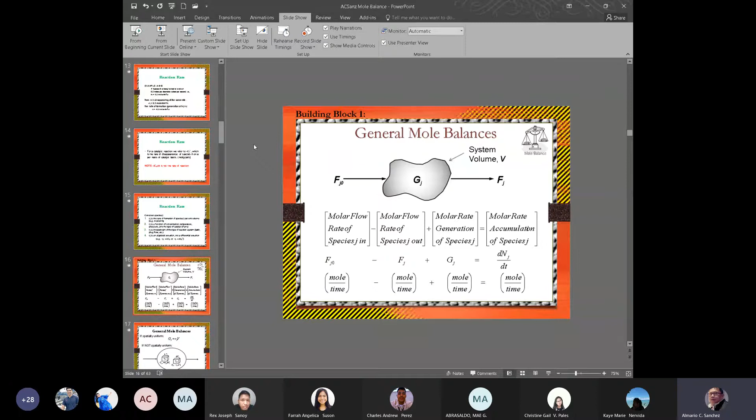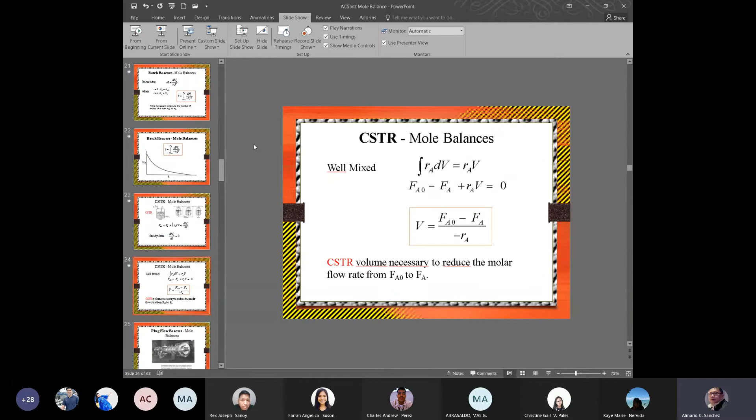But then I realized that if we are going to do these things directly, like chemical engineering balancing and reaction rate, we might struggle, especially with this general mole balance. I believe before we proceed, maybe tomorrow or Monday or Tuesday, this is the heart of it, the essence of our topic. And this is a very long topic, everything needs your prior knowledge.

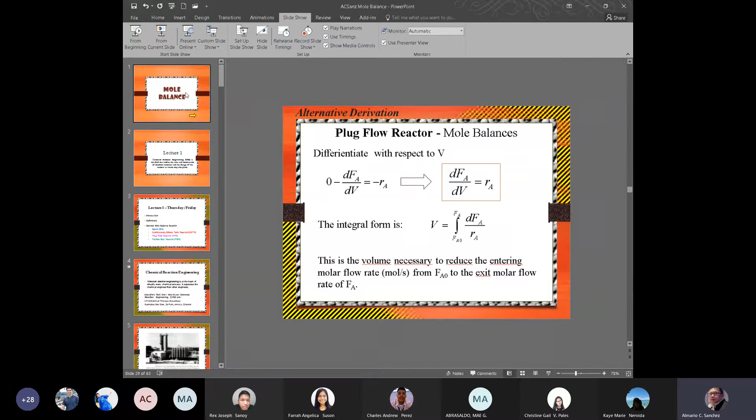All your knowledge needs to be applied here regarding chemical engineering. So what I'm going to do is give you the theory, so we can recall our theories about mole balance in relation to this subject, chemical reaction engineering and kinetics. Let's just recall it. So we'll go directly to a video.

Wait. Not this one. Okay.

What's up guys, it's me, chemical engineering guy, and we're going to continue with the topic. This is a video taken from the mass balance YouTube course by the chemical engineering guy, introduction. You can also find MB number one on YouTube. We've seen MB number 0, which is essentially just the overview of the course.

Sorry about it. Let's continue with the next chapter, which is essentially only two sections. The content here is section 1, which is the theory, which I like to call the basics of process or chemical engineering. The least stuff you need to know as a chemical engineer is here.

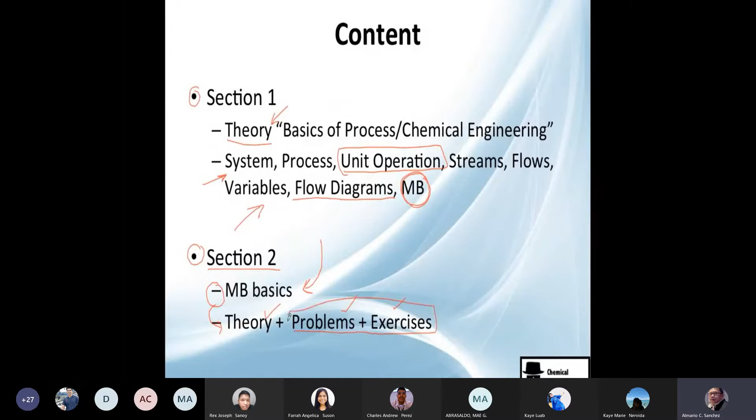Now, once we understand the basics of mass balance theory, we're going to see some problems and exercises. These are the ones that are going to help you to understand. Now, let's continue with section 1.

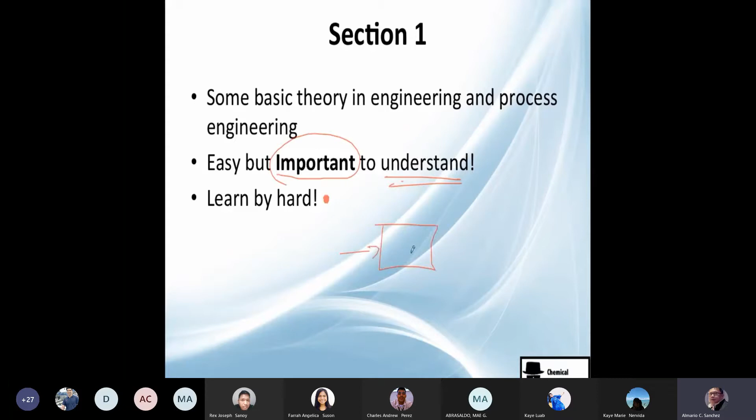It's some basic theory in engineering and process engineering. As I told you before, it's very easy because it's just to learn, but it's very important to understand it. Don't just learn it by heart, but at least learn it very hard if you cannot remember, but understand. You need to understand what is a system, what is within, what is without, etc.

Now, let's continue with the theory. The basic definitions that we're going to see are these ones here.

Chemical processes are in general processes that involve some stuff of chemical, like production, reactions, products, reactants, etc. We're going to see what is a unit operation, how to distinguish it from other, non-unit operation things.

Then streams, flows, is essentially all the arrows you see in a process. It's matter being held here. Then process variables, which is like pressure in the tank, temperature of the current or flow, composition of A in the flow, velocity, height of the tank, etc.

Now we're going to see what is a flow diagram. This is very important because we are going to base our problems in this one. And actually we have three, which we're going to see further. Then, well, this one should be inside of this flow diagram, block diagram, etc.

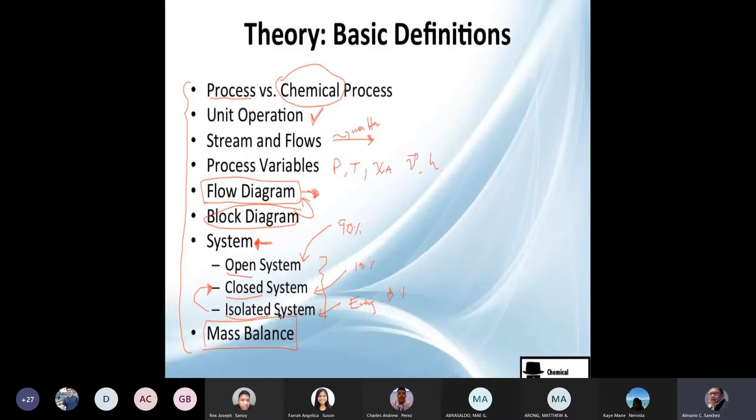Now let's continue. I told you we're going to see process. Let's give a formal definition of process. Process is simply a series of actions or steps taken in order, it's important, in order to achieve a particular end or product. You start here, you go here, then you go here, you finish here, etc. I'd like to present you a diagram of a crushing plant.

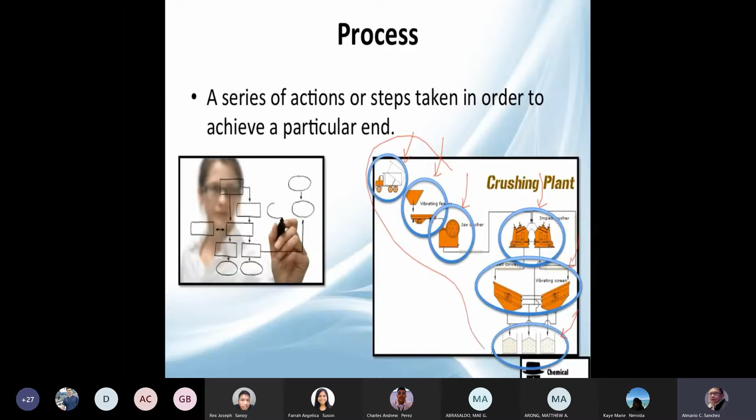Crushing plant is nothing but this process here. And one thing that I want to show you is that actually processes are made many times out of many processes. All these circles are processes, and the total of these processes makes another process.

Let's see. Number one, you need to bring the stones from the mine. Number two, you need to put them or throw them in this feeder to transport it. Number three, you're going to crush them. But it's not like that fine, okay?

We continue, we go to the impact crusher, keeps crushing and crushing. Then we bring them here. It's already crushed. Then we're going to vibrate, and they will go very, very finely crushed. You see, this is small, this is medium, and this is big.

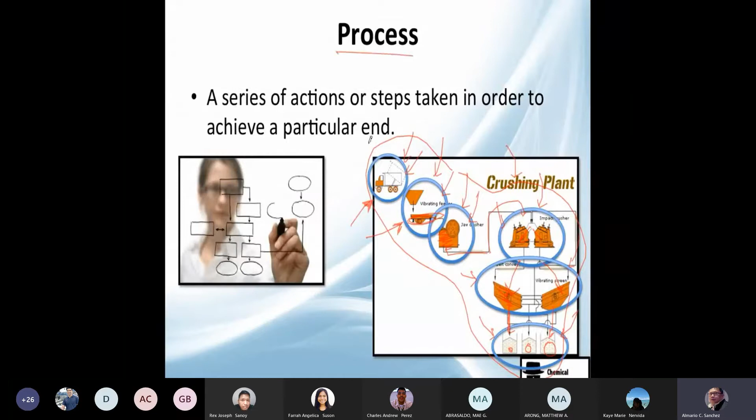Now you see each process: transporting, crushing, separating, and storage. All these processes make a whole process, which is called the crushing plant. So just take importance that you can always make sub-processes inside a process.

Now let's understand the difference between a normal process and a chemical process. A chemical process is essentially, let me show you the meaning from Wikipedia. I like it very much.

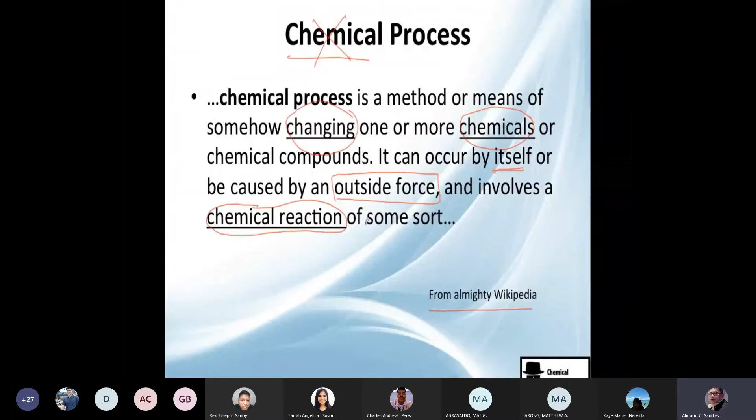A chemical process is a method or a means of somehow changing, you need to have a change. One or more chemicals must be involved, or chemical compounds. It can occur by itself, it's not that normal, or caused by an outside force, which we are going to give. And it always involves a chemical reaction. If there's no chemical reaction, it is not a chemical process. So just learn this: change of chemicals, outside force, and it involves a reaction.

If you understand that, you are going good. Now, this is a chemical process: the production of mighty beer. I love beer, you love this, you've probably seen one before. It consists essentially of milling, mashing, lautering.

This one is very important, boiling. Then comes the whirlpool, then comes the cooling. And the most important part is the fermentation. This circle here has the most important chemical reaction. So this one here makes the whole process a chemical process.

But for example, milling is not that chemical process. Mashing probably not, it's only mixing water. It may have some chemical reactions, but it's not the main chemical reaction.

The main chemical reaction comes here, and also maturing, but not that much. Filtering is only taking stuff out of the liquid, and packaging does not involve generally. Then it goes to distribution. So this whole process is a chemical process just because there's a fermentation here, a chemical process.

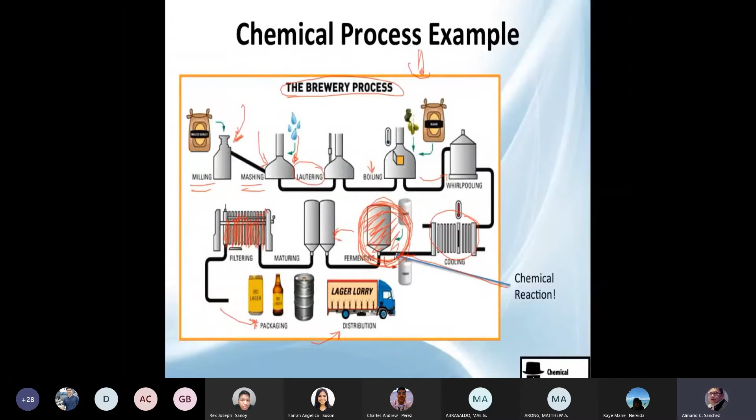Okay, now let's keep going with the type of diagram. The block diagram, maybe you know, is the most simple one. Flow diagram is a little bit more technical. Let's say if it's a tank, you might add something more, like you will say only tank here, tank here also. Maybe you add extra data: temperature, pressure, steel, materials, etc. And this one here is like the most complete one.

It will actually tell you, oh, you have this electronic device here, and this one goes here. This pipe is about 4 inches. I don't know, it will be more complete. I'm going to explain them in the next slides.

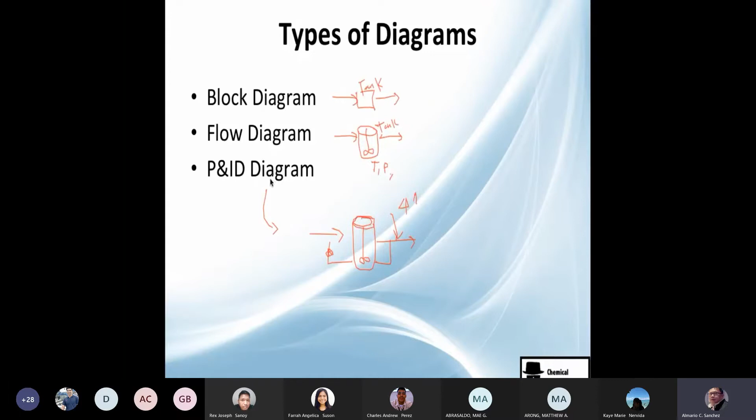Now, block diagram, easy. It's a simple diagram that shows at a glance the process. So no complications. I just want to see here the reactor. There's a gas separator and a distillation. It's the most used for mass balance solving. Why? Because we don't need to know how the reactor is operating. We just need to know the mass balance, what enters and what goes out.

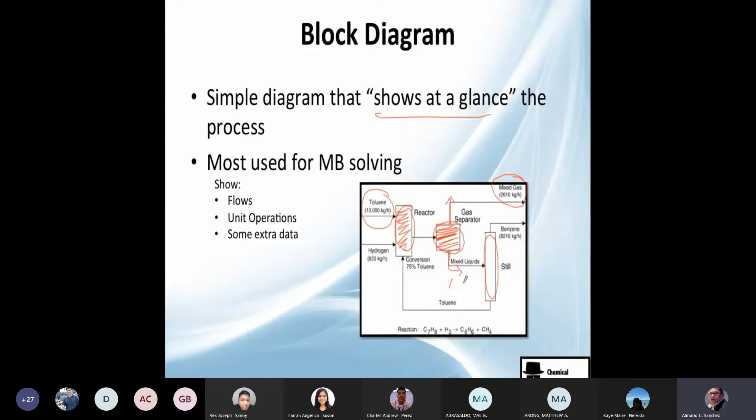Now, gas separator, you don't need to know the mass separation principle that it works. You just need to know how much concentration or flow is going here, the mixed liquids, the concentrations, etc. And the distillation, you don't need to know how it operates. You don't need to know how many plates you need, how much must be the diameter of the tower. No, you just need to know what goes up, what goes down, or the feed.

Okay, so this is the most used because it's fast. Just if you're interested in the mass balance, you just keep doing these ones and ignore all the ones I drew here.

Now, it's very important to include flows. This is the ones you need to include, these are all these arrows. Unit operations, I told you, you don't need to know how they operate, but just show them so you know, like this box makes something magical. I like to call this the black box, because you don't know what happens there, but something is happening.

Put it there, and some extra data, for example, conversion. Actually, you don't know how this works, like how many degrees or how much energy it needs. You don't know the reactions or etc. You just know that there's a 75% conversion. Okay, basic.

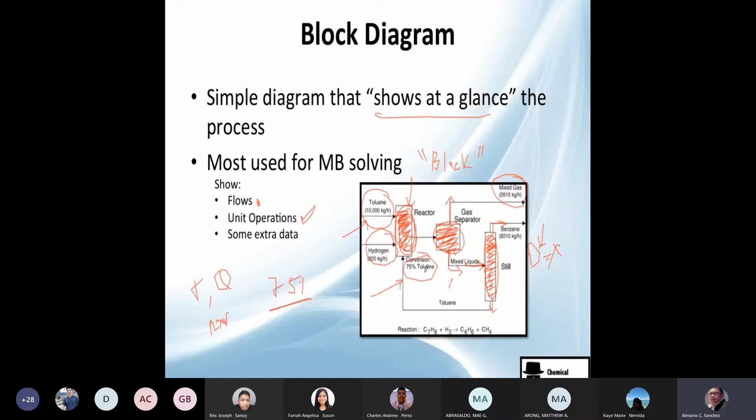Now let's go for the flow diagram, which is essentially the same, just with a little bit more data. For example, you have this here, you divide it top, bottom, you show the heat exchanger, a pump maybe, a storage center here, your main operation unit, you show this valve, etc. This is like the typical process flow.

Not that much information, it's enough. I don't recommend doing this that much in mass balance, because then you will need this current, then it mixes and comes to this valve. Let me do a mass balance in this valve. Doesn't make sense, because it's actually just entering the same and the outlet is also the same.

Also in a condenser, the only thing you change is temperature, maybe a little bit pressure, I don't think so. So just keep with the temperature. So the stuff entering here is the same as the outlet, so ignore that, okay? But it's important, if you're actually doing a mass balance and energy balance, you will have to know where is the condenser, where is the heat exchanger, where is this one here, the boiler, etc.

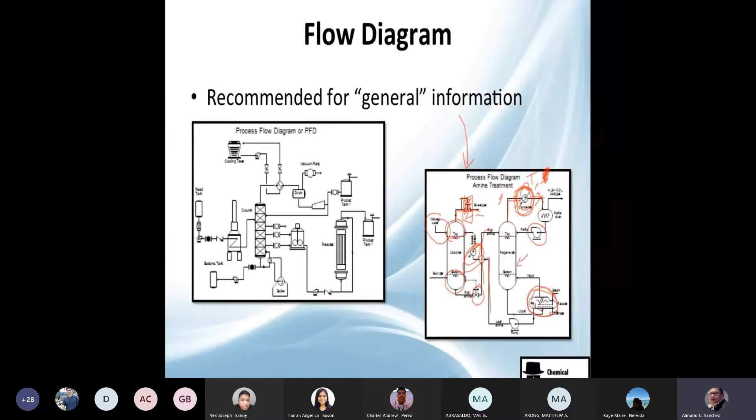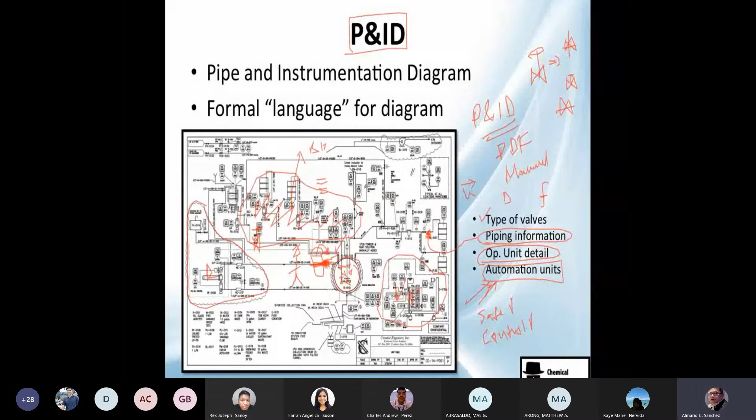Now let's continue. I absolutely do not recommend this level of detail for a mass balance. If you're working with this, you'll probably say, okay, all this part can be called a black box, and you don't need to take care of it. Then you'll see this one is one unit - let's say it's a refrigeration unit. You put all these together and say this is the vapor recuperation unit, etc. You can build systems over systems, so don't worry.

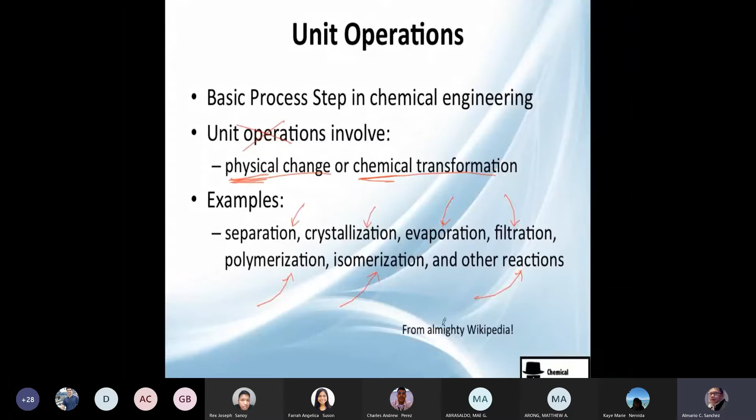Finally, let's talk about unit operations. It's a basic process step in a chemical engineering process. A unit operation almost always involves a physical change or chemical transformation - if you don't have either of these, you are not having a unit operation. So always remember physical or chemical change. For example: separation is physical, crystallization is physical, evaporation is physical, filtration is physical, polymerization is chemical, isomerization is chemical, and other reactions are obviously chemical - from almighty Wikipedia.

Now let's see some unit operations - I put them here in red. You can see the ones about reaction engineering, which is just a reactor - anything that reacts, you can call a reactor. Now let's see the heat operation units. What can you use for heat transfer? You can either condense, evaporate, or simply exchange heat. This is to increase or decrease temperature, this is to change liquid to gas, and this is to change gas to liquid. You could also have a freezer, etc.

Now let's continue with the mass operations, which is the largest section here. We have crystallizer, filter, cyclone, any separator, any mixer, a distillation column, absorption - which is not the same as adsorption, just remember that. Absorption and adsorption are totally different stuff, so take care. And finally we see unit operations of momentum, which are in general pumps, compressors, and maybe a storage tank.

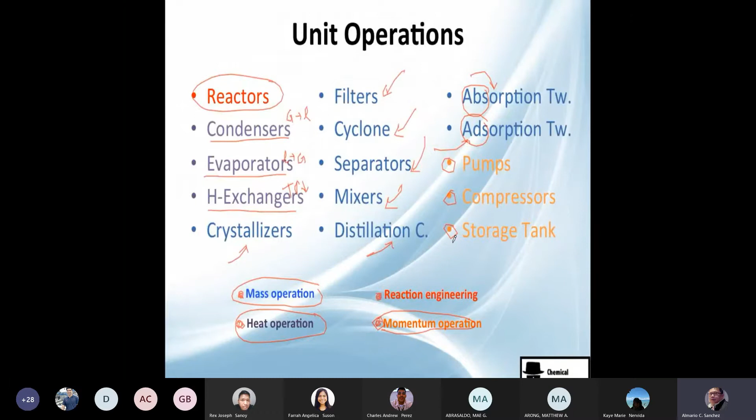Just keep those in mind, and you will get the idea of what unit operation we are talking about. In mass balance, we're going to see a lot of unit operations, so don't worry - if you have doubt, just check what the unit operation is. Like if I tell you it's a dryer and you don't know what a dryer is or how it operates, just check.

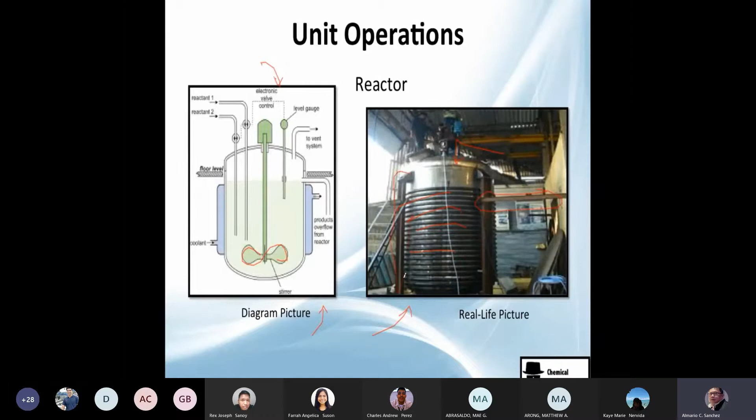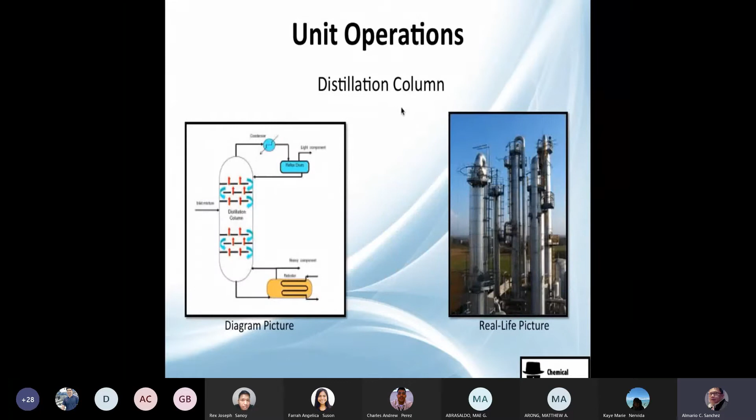Here's an example. How do you see this in school, in the books? Very nice - you can see everything. The problem is when you get to real life, you don't see that much. You only see outside, some tubes, maybe inlets, but you don't know where everything is inside. You'll see the column for head and bottom, and in real life you'll see a lot, but here you don't see that much detail - though there's a lot of stuff, like escalators for men. That last one was a distillation column, which is mass transfer. Heat exchange will simply be a tube heat exchanger, where many tubes go through.

You will see that in mass and heat transfer class. The idea is that one fluid goes like this, and the other fluid goes through the tubes. They don't touch physically. One goes inside the tube, the other goes outside the tube, so they are touching each other here.

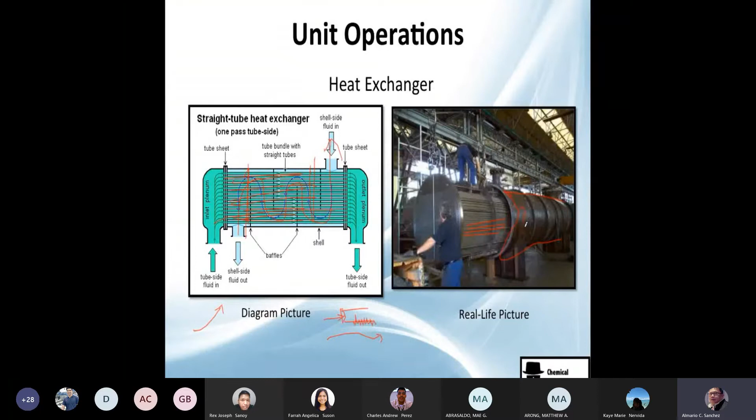In real life, this one is nice because you can actually see the tubes, but usually you will see only a huge pipe. I thought it was a pipe, not a heat exchanger, and a centrifugal pump, which is the momentum one.

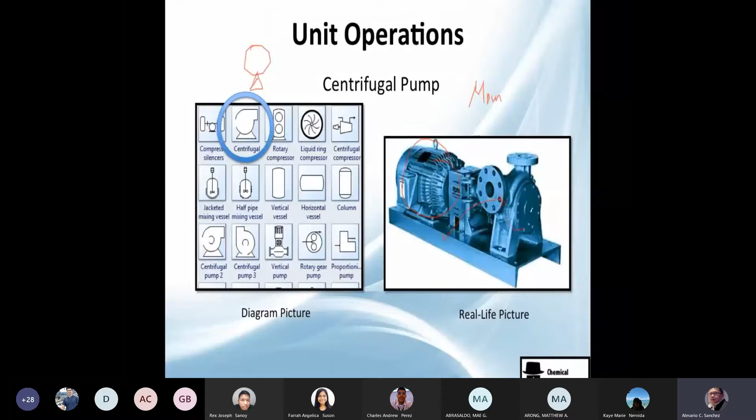In a diagram picture, you will see simply this, or even something like this. But in real life you will see there's a motor here, and there's the inlet, then it goes out.

Let's continue now with the process variables. The process variable is, in general, a process value or a process parameter, which shows the current status of a process under control.

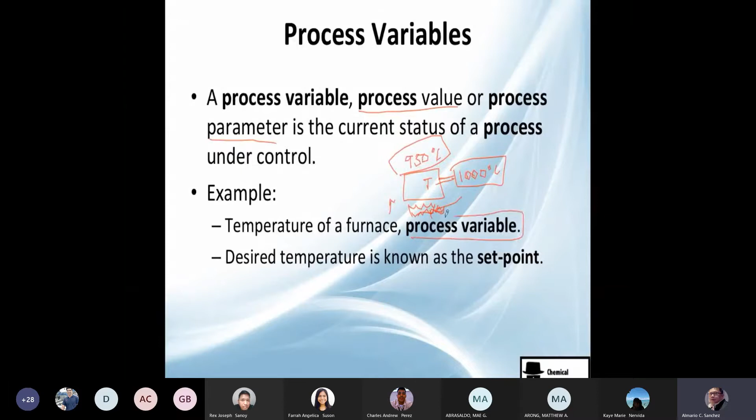Examples are the temperature of a furnace. You're burning and you want a temperature of, say, 1000 Celsius degrees. That's what you want, but actually let's say you're only getting 950. This is your process variable, and this is your set point. The most logical thing to do will be to burn more fuel to increase the temperature, so you're going to try to get the process variable to match the set point.

Typical process variables are pressure, volume, temperature, density, height, concentration, flow, and also conversion.

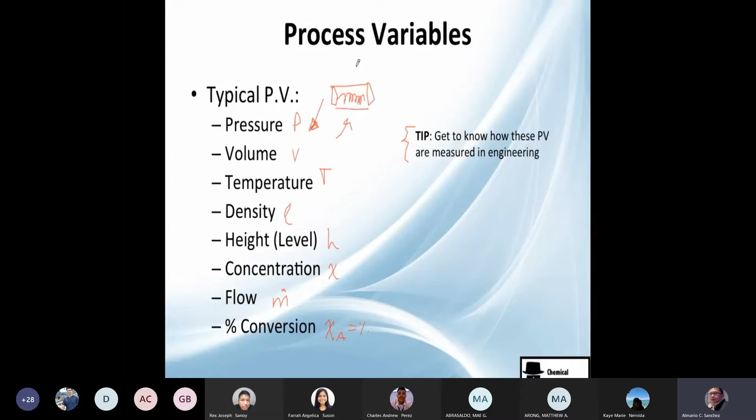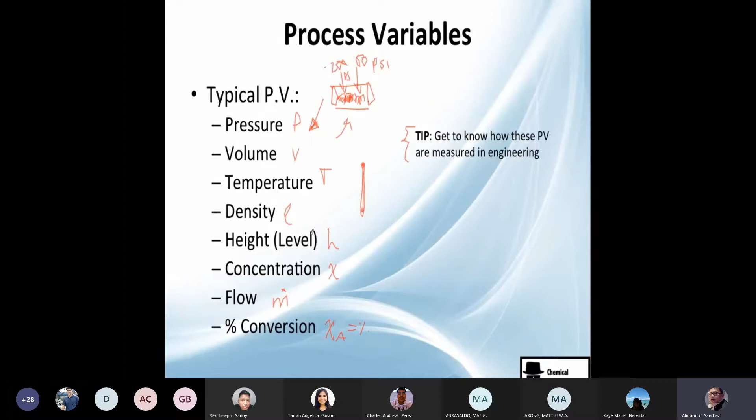I recommend you guys, if you can, get to know how these process variables are measured in real life. For pressure, you'll see a lot of computer stuff, but eventually there's something that connects it, for example a spring you know is at 50 psi, and it shrinks here, then it's 200 psi, okay? Makes sense. Temperature, well you know it, maybe simpler with a thermometer, density, etc.

Now let's continue with flow. What is a flow? We're going to talk a lot about flows, so please understand this. We'll talk about mass flow, mole flow or molar flow, and volume flow or volumetric flow. Mass flow, in general, with international units of kilogram per second, is simply mass flowing per unit time, how much mass I'm transferring per unit time.

Now, the molar flow is essentially the same, but not mass, it's moles—how many moles I'm transferring per time. Finally, volumetric flow, typically cubic meter per second, is how much volume I'm transferring per time. So hopefully you get that.

If you don't understand this, it's simply like if you have one glass of water, you are getting water inside here. How much time do you need? How much volume is it? Then you will see that you can calculate the volumetric flow just like volume over time. You can play with this equation, like how much time will I need to fill the volume if the volumetric flow is this one. So it's really, really easy, guys. Don't worry, we're going to use them later in exercises.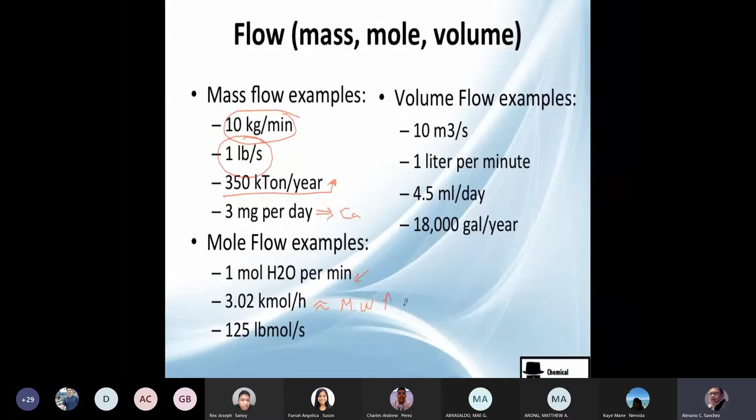Mole flow examples: 1 mole of water per minute is actually not that much. 3.02 kilomole per hour—depends on the substance. Maybe if the molecular weight is big, it will be a lot of mass, so if this is a polymer it will be a lot. And 125 pound-mole per second. We're going to see that later.

Volume flow examples are easy, I already explained that. 1 liter per minute—I think that's the most intuitive one. 1 liter, like a tetra pack of milk, per minute. Imagine if I told you this cow produces 1 liter of milk per minute—you could in 60 minutes fill 60 bottles of 1 liter.

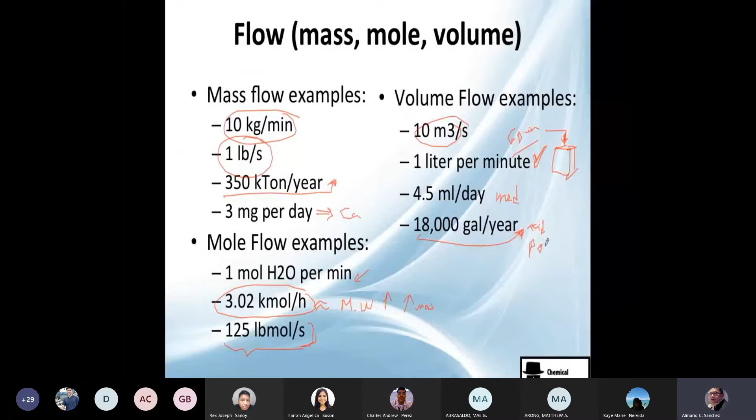4.5 milliliters per day, maybe this is medicine you need to take. And 18,000 gallons per year, maybe acid rain in a city or in a pond—I don't know, you be creative.

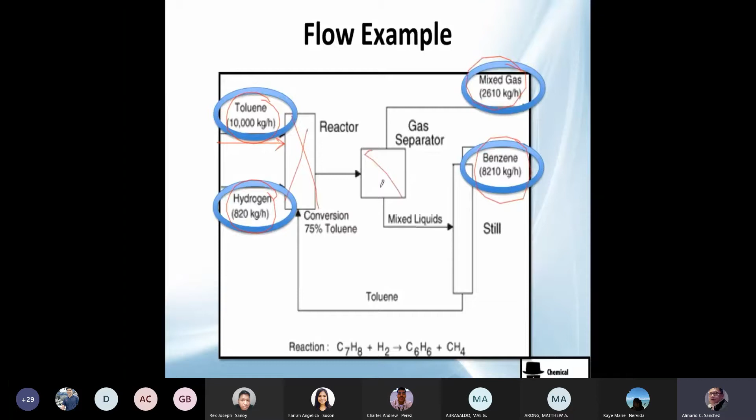This is where we're going to put our flow examples. We have the arrow, and we generally try to put them on the arrow so we know fast, very fast, where it is—look here and here. These are the operation units we already saw.

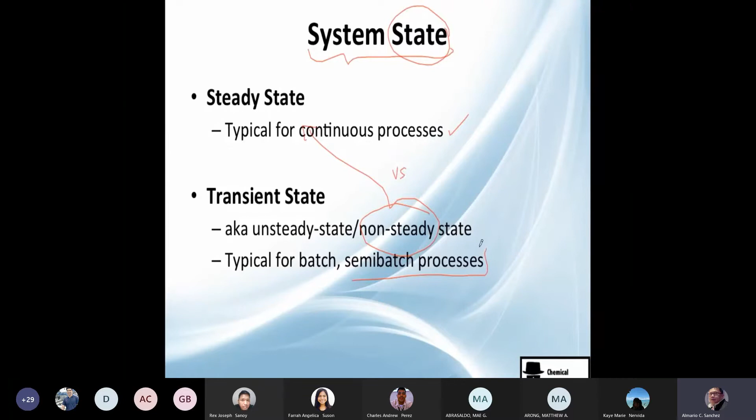And it's time to enter this last part, which is the state of the system, or the system state. What do we mean by state? Let's see. Steady state is typical for continuous processes, and transient state is also known as unsteady state or non-steady state. Makes sense? Like the counterpart, steady versus non-steady. And it's typical for batch and semi-batch processes. We're going to see these ones later.

So, steady state is when all values of all variables in a process do not change. That I remark, not in time.

So imagine this diagram. The operation of a plant typically is all year, 24 hours. So what you will expect is, I have this reactor, I want it to work at least 10 years with this flow. I want to keep this flow. Suppose that we don't have an increase in demand. That will be nice. Actually, in real life, you do have a decrease or increase of demand. So you only need to take this amount of benzene.

You're selling almost 8.2 tons of benzene. That is what you're selling. I don't know, maybe you sell it for, no idea, $10 a kilo, which I think is a lot. So if you keep working like this, you want to, well, if you have 10 tons of toluene, you need 820 kilograms of hydrogen.

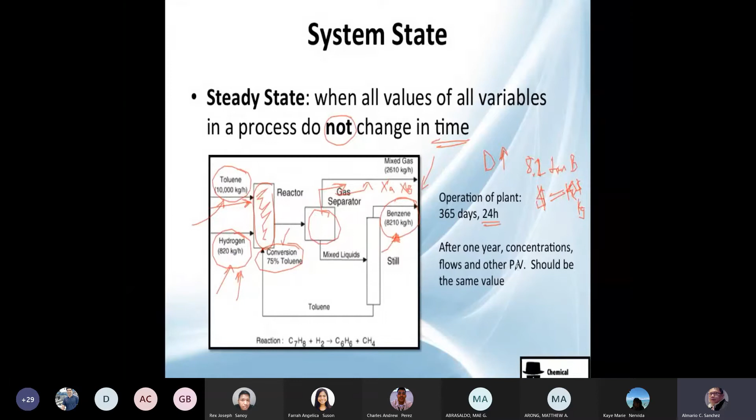So keep doing this, you will have this conversion always the same because it's operating continuously. The gas separator will always separate this amount of gas with the concentration of A, B, and C, blah blah blah, the same, and our product will be the same purity here. So after 1 year, the concentrations, flows, and other variables will be, or should be, the same.

Now, what happens when that does not actually happen? Let's see it here. The transient state is essentially when any of the variables changes with time. So there is actual change.

Now I brought here, let's see, we have a pot, and we are here with fire. In the example, I don't know, you have 10 liters here, maybe it's water. And in time 0, you have those 10 kilo or 10 liters, which, if it were water, would be 10 kilograms of water.

After 5 hours, time 2, you only have 2 liters, which is about 2 kilograms. So of course you lower the level, you lower the mass inside. If you are making the balance here, you increase here, you decrease here because it goes here, here, here, evaporates, condensates, and comes here.

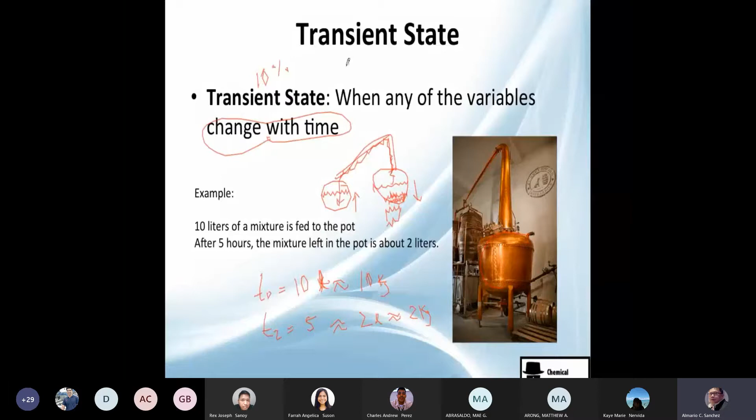So transient state, just be thinking about there's a change in time. We're not going to see that much of it, we're actually seeing like 10% of these. The course is not based on this transient state... the most typical one is the continuous one, so pay attention in that one.

We have other types of classification, which will be the batch process. This is a process that is being fed once, then time elapses, and then the process products are removed. So you feed, you close, you react, and you discharge. Continuous process, as I told you, is where the input and output flows react continuously throughout the duration of the process, so there's no change in time.

The semi-batch process will be the combination of batch and continuous. So you have some type of this batch process, and you have this type of continuous process. For example, charging a reactor.

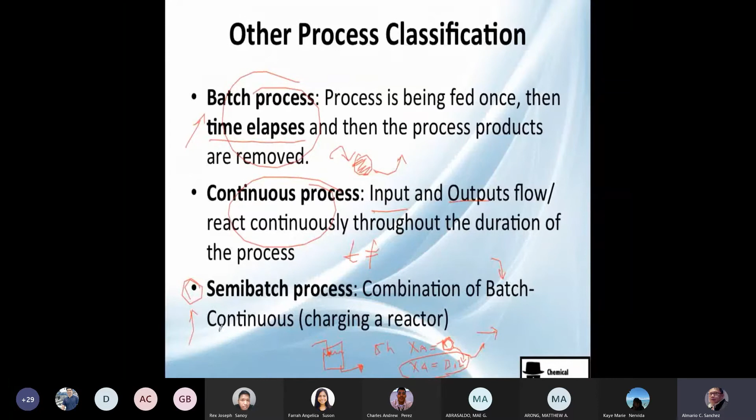In general, when you are starting up a reactor, you don't have the desired concentration. So the first 5 hours, the concentration of A, let's say, starts at 0 and finishes at, I don't know, 20%. And then you can operate the reactor at 20% all you want, all time long. But you need to change from this 0% to this 20% here. So just pay attention, we're not going to see this too much. This is more typical in reactor engineering, but you need to at least know that it's a semi-batch process.

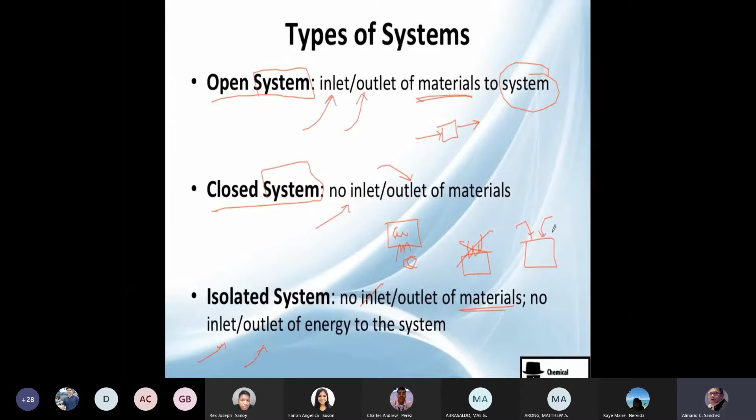The isolated system has no inlet, no outlet of materials, and we need to include that there's no inlet or outlet to the system. So we can interact with heat in some cases, but here we cannot. This is like the most perfect case, which actually does not exist, but we can approximate many systems to this.

I have examples here. An open system will be this: bubbles go out, dust can come in, maybe even a bug, water can also evaporate, so there's inlet and outlet. It's an open system. A closed system, on the other hand, nothing can go in and nothing can go out.

But if you let this in your office, say it's 5 Celsius degrees, super cold, you like it that way, and the ambient temperature is 30 degrees, the temperature will eventually go up and this bottle will be the same temperature as the air. There's heat exchange.

And finally the isolated system, that's why I'm telling you technically it does not exist. It will be this one here: you have no inlet, you have no outlet. Besides, this material is so non-conductive, it does not exchange energy. It's like a super bad conductor.

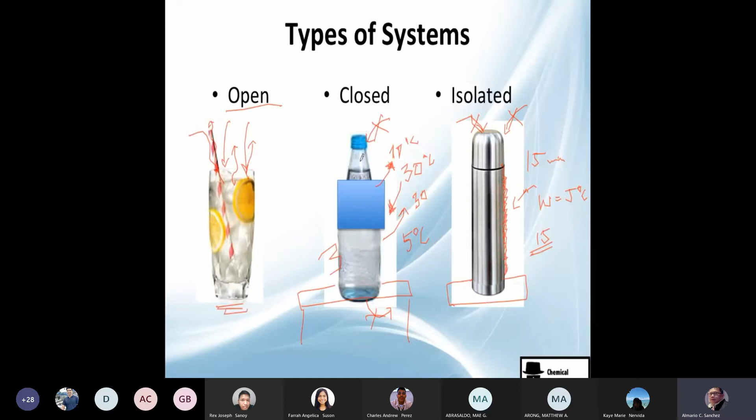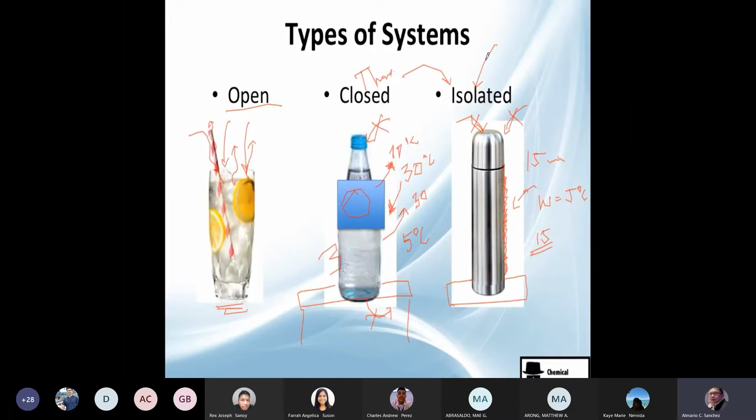Open is the most common: enter, out, inlet, outlet. Closed is okay, more typical in thermodynamics. And isolated is ideal, it actually does not exist, but we try to be like that. Don't worry, just reread if you do not understand the example. I think it's clear: inlets, outlets, energy involved, etc.

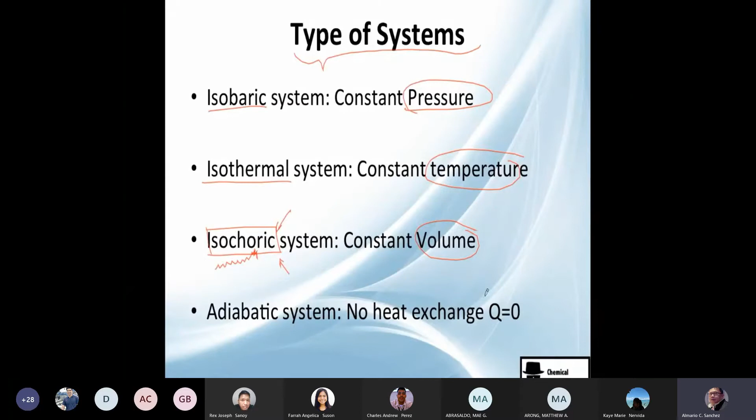The last thing I'm going to cover is the type of systems according to variables. What happens when the pressure is constant? It's isobaric. What happens when the temperature is constant is isothermal. What happens when the volume is constant? Isochoric, which is not that common. Have you ever heard of isochoric before? I hadn't heard it before, so I think it's kind of exotic. And adiabatic is when there's no heat exchange, like an isolation.

And that was everything in this section 1 of this chapter, mass balance theory. Please make sure you understood all the material before advancing to the next section. I'm serious, guys, because if you do not understand what a process is, what I mean by open process, open system, and process variable, etc., you will get lost in the next section. So please make sure, and enjoy your course.

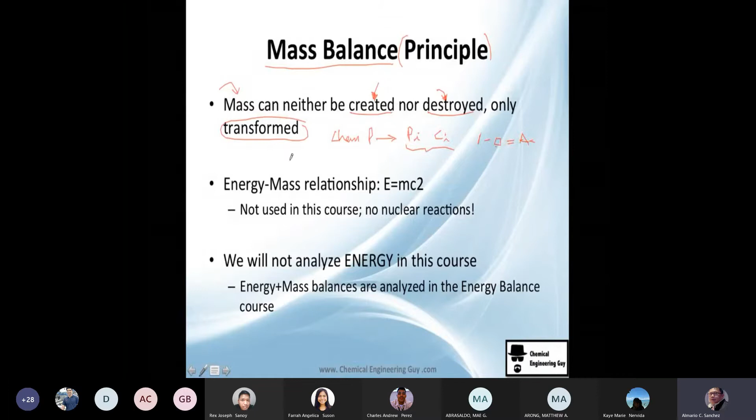That's cool, I think, because you can make an actual equation like inlet minus outlet equals accumulation, or something like that. If we didn't have this, we could not do the equation and it would probably just be a guess. So that's cool.

We're not going to see energy in this course, not at all. Actually, many students tell me energy and mass have a relationship, it's equal to this, the very famous equation: energy equals mass times the speed of light to the second power. No, we're not going to use this because this is only in nuclear reactions. It's true, nuclear reaction is a chemical reaction, but we are not going to see these reactions in this type of process.

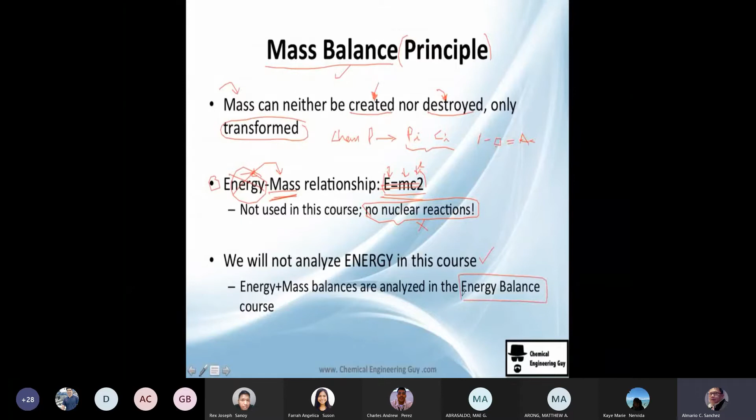We're going to see only chemical conversions that don't involve nuclear chemistry. So don't worry, if you want to learn more about energy, you can go to the energy balance course. But in this course, we are only concerned with mass. Just go to the energy balance course if you really want to learn more about energy.

Okay, what's the principle in general? Remember, the definition of a system is any portion of the universe. You choose it, but if you choose it, you need to delimit it with boundaries. So let's say in this case I have this system. Inside, a reaction could happen. We could be mixing, splitting, drying, humidifying, heating, pressurizing. There are many processes that could happen to the system.

And of course, if we're talking about mass or matter, you could get inside matter. For example, if you have a house, you could go inside, bring groceries, you're bringing food inside the house. And of course you can also have outlets. If you take all your garbage out of the house, you're taking out matter. You go inside, goes food, outside goes garbage. And consumption will be, if you are eating food, there's going to be a consumption, there's going to be a production. I'm going to make an example later so you can get

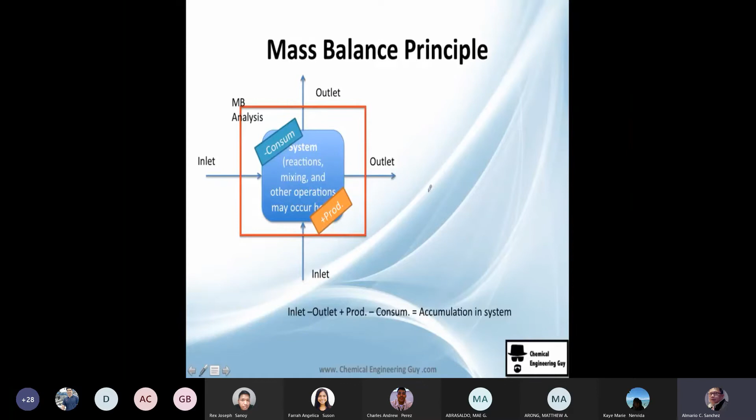So, as I said before, this is the system. Now we want to do an actual equation. So if I wanted to know how much mass is going inside the system, for example, if I have this glass of water empty and I start filling it, I'm accumulating water. Or on the other side, if I have this big container full and I'm emptying it, and this is my system, this is my system.

Well, the concept of accumulation is how much matter per unit time you are accumulating or not accumulating. So this will be done with these four concepts: inlet, outlet, production, and consumption. The inlet is here, as I told you, and we could have many inlets anywhere, it doesn't have to be left or down. You could have many outlets, actually an arrow just going out of the system. Also, you could have it everywhere.

The concept of production: if you're having a chemical reaction, you are producing something. You have a reaction A converting to B with a lot of temperature, then you're producing B. You ask yourself, why am I increasing the concentration of B? It's obvious because you're actually converting A to B. Now consumption will be, for example, if you're doing a mass balance on A, you'll be asking yourself why A is disappearing, because of course it's reacting to convert to B. So that's either consumption or production.

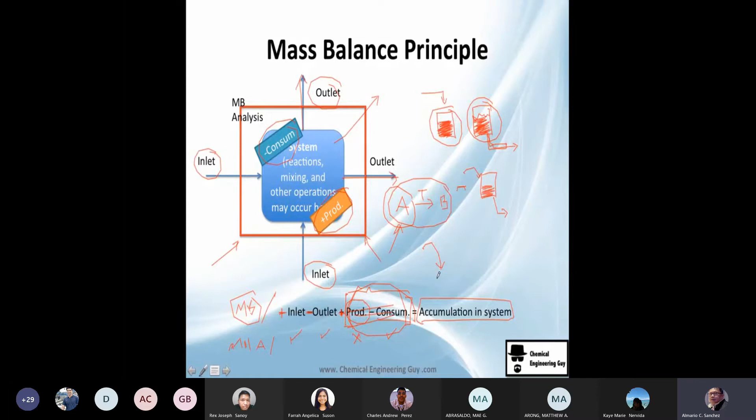Now let's do a simple example—I call this the city example. Inlet of people is immigration, it will always be positive. Imagine this city is so cool that many people want to go in—50 people are going in, say per year, or could be per day. You're in a cool city, 50 persons per day sounds normal.

And outlet—we're taking people out. People don't like the city. They thought it was cool but they stay and say, nah, I actually don't like this. So we have emigration, -3. Then inside the city, people are being born—100 babies per year or per day, it doesn't depend on the size. And of course you'll have people dying—that's sad, but we have people dying, or consuming themselves.

The accumulation—hopefully now you understand what accumulation is. What will be the accumulation of the city? This is almost intuitive: how much is the growth of the city? You just do this addition: 50 minus 3 plus 100 minus 25, which gives you 122. Since it's positive, you are accumulating 122 persons per year.

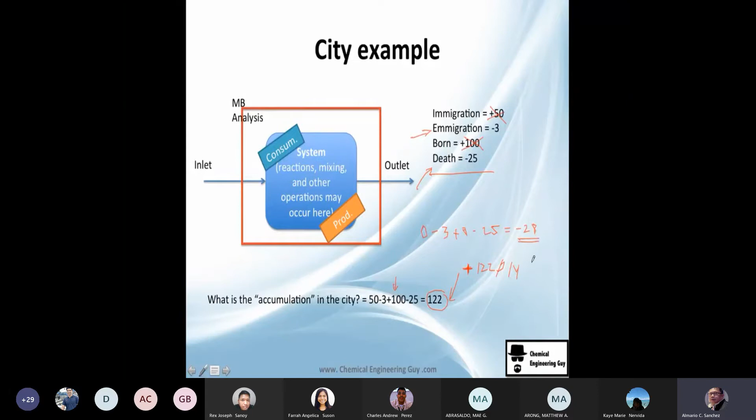Hopefully you get the example, because we're going to go to a similar example, but now with more chemistry.

So if I ask you what is the accumulation in the system, and I tell you I have an inlet of 100 kilos of A, and a production of 0—I'm not producing A, let's say it's the reaction I told you before, A converting to B, so no production. Then the consumption is 50. I just got 100 kilos, and from these 100 kilos, you are producing 50 kilos of B, which means 50 kilos of A are being consumed. The outlet, let's say, is 25 kilos.

So it's very easy: I'm putting 100 kilos inside, the outlet is 25 kilos. So in this system we have 75 left, 50 are being consumed, so 50 out. So the accumulation—the system is accumulating 25 kg. What does that mean? It probably, with time, will get full of A because it's not reacting, and we'll have to take out those moles.

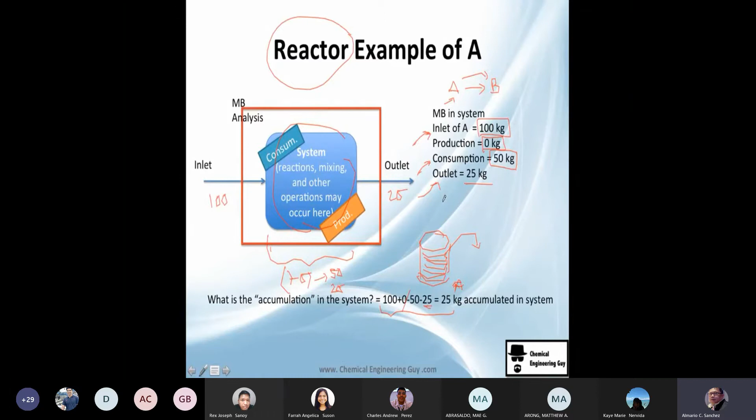We're going to see more complicated problems, so just keep reading.

Now we're going to see the mass balance equation. I told you before it was something about inlet minus outlet plus production and consumption. This is very typical for chemical processes and chemical reactions, but it's also typical for mass balance in general.

This is equal to the accumulation. Accumulation is always generally mass over time, so mass is accumulating in time in the system. So we do actually account how much mass is getting in this time.

What I want to show you here is that we can do a mass balance on a species. When I say species, it could be any value, like CO2, moles of A, or water, etc. So we could have inlet of water, outlet of water, production of water if you have a reaction that produces it, minus consumption of water if another reaction consumes it. This will give you the water in the system, how much water is being accumulated in the system.

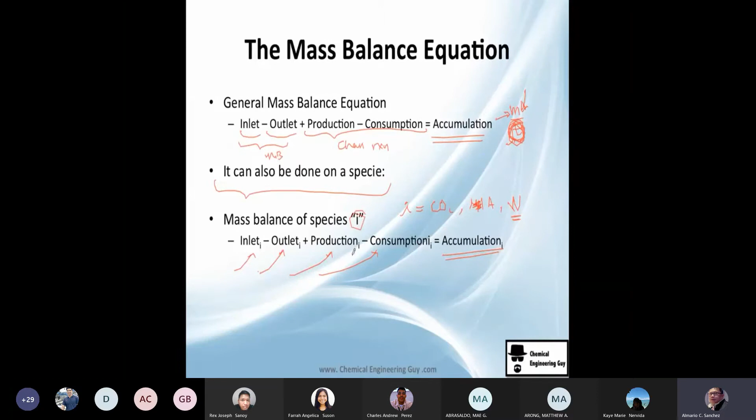So just get used to that. We're going to see that much further in chemical reactions, but just know that we can do mass balance over species.

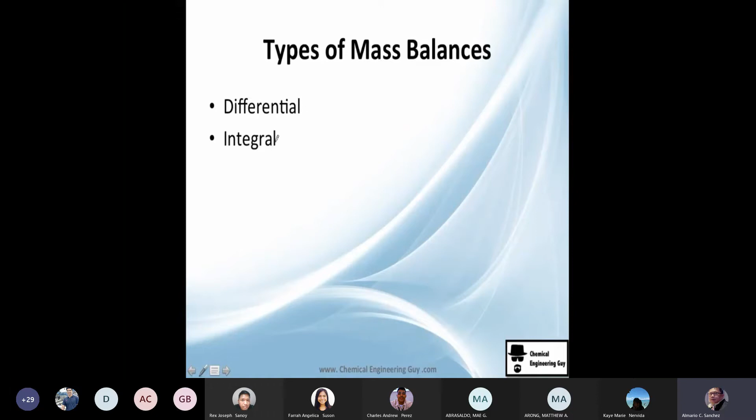Now we're going to see two different types of mass balance: differential and integral mass balances. Differential mass balance is essentially an analysis at one instant of time, meaning as time goes to zero. We're going to use a lot of velocities or rates, for example grams per second, kilograms per hour, barrels per day. It's typical for continuous processes.

Since we are very interested in these processes, this is typical in chemical engineering. You have plants that work 24 hours a day, every day. So this is a continuous process. The temperature, kilos, everything, we try to keep the same. So this is a continuous process, if you remember.

The tip I use here is it's very convenient to use a time base. So if you have, say, 10 kilograms per hour, I would use 1 hour so you only have 10 kilos to analyze. You don't have to, but I do recommend it.

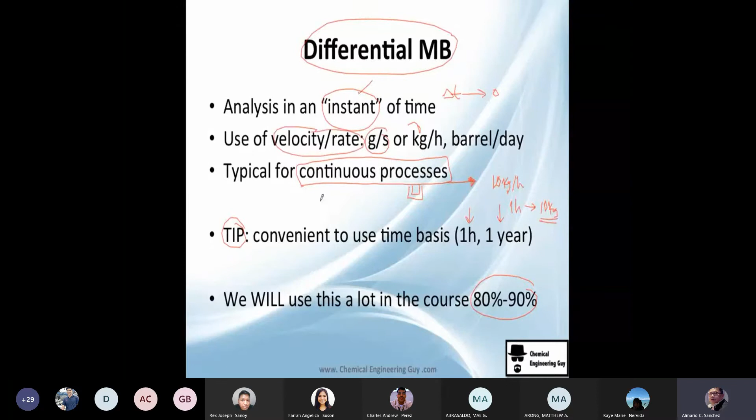We will use this a lot in the course. This is like 80 to 90% of the balances we're going to use, so please get to know it very, very well. Remember: instant, velocity or rate, and typical for continuous processes.

Now the integral one, which we're going to see only about 10 to 20% of the time. You're probably asking me why we're going to see this. It's very important to do other types of balances that don't imply continuous processes. Actually, it's very cool because you do processes between 2 instances of time, so you have time 0 or time 1, and a final time.

For example, you might ask why are we studying this. Maybe you're filling a tank. You have, say, 10 liters per hour, and a 100 liter capacity. What will be the time needed to fill the tank? Without math, you can say 10 hours, you need 10 hours to fill 100 liters if you're flowing in 10 liters per hour of water.

That's why we use 2 times or 2 instants of time. We use quantities rather than velocities. Before it was velocities, but in this one we're going to use more quantities. As I said, 100 liters is punctual. Before you wanted the velocity, like the rate, 100 kilograms per second. But now we're going to be more interested in the quantities, like kilogram, ton, pound, liter, etc.

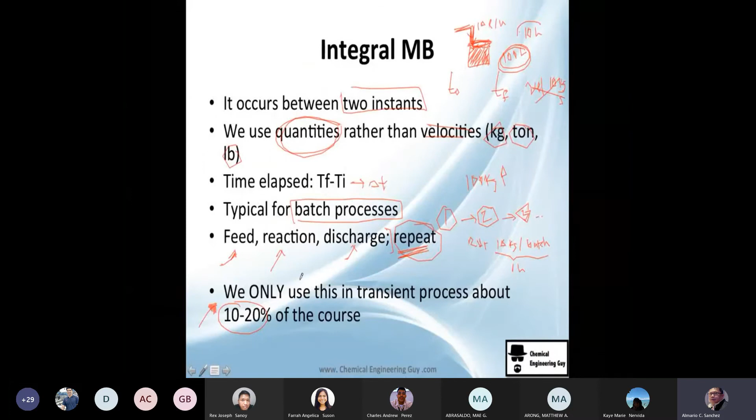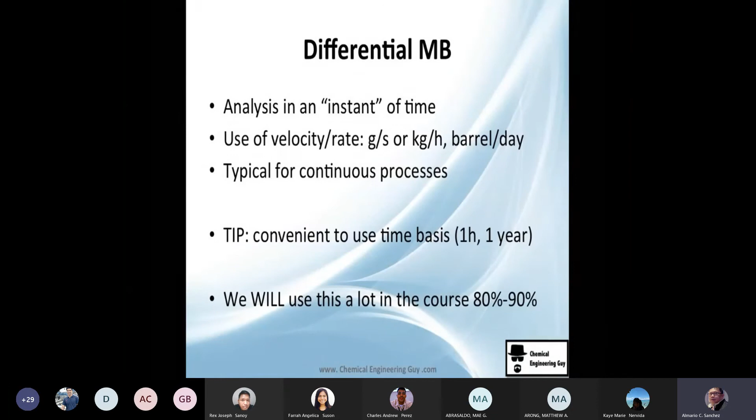So that was about integral balances. Differential balances are the important ones. Don't get confused — it doesn't mean integral is not important, but if I were a student and didn't have that much time, I would recommend you study the differential mass balance. Unless you know your exam is about integral mass balancing or transient processes, please study that. But if not, I do recommend you study this differential mass balancing.

What's up, guys? It's chemical engineering guy, and I'm going to teach you the type of processes that we're going to see in our course in mass balancing. Previously we've seen the theory in section 1. If you haven't seen the video, I actually recommend you see it so you can get used to what is a process, what's a system, what's the flow, diagrams, etc. Once you see section number 1, you could see here the types of process we're going to see in mass balance.

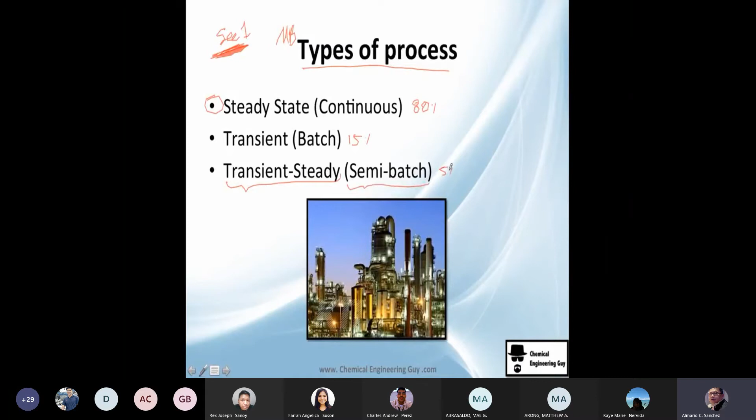In general, it's steady state, which is typical for continuous processes. I'll say this is like 80% of the course, so it is very important. Then we're going to see the transient states, typical for batch — about 15%. And finally, we see the transient-steady state combination, typical for semi-batch, only 5%. I'm going to explain them here and give you an example of each.

So here we go: mass balance in steady state. In general, we're going to say there is no accumulation term. Why? Because, for example, if we're filling a cup, water goes in and water goes out, so you're having the same height. Or if you have a reactor, you're feeding 100 kilos and getting 100 kilos of product, A and B. If your system has accumulation, every time as time passes by, you will be filling, and eventually your reactor will spill. You probably know that in chemical engineering or chemical plants, they work like 365 days a year, 24 hours a day.

And of course, many processes of those types operate at a steady state. What does that mean? That properties like temperature, pressure, flows, concentrations, height levels, volume, densities, etc. — no properties will change with time. So if I come to this plant in the morning one Monday, and then go at night one Sunday, or one Tuesday, or one Friday, or even a month later, they should be operating under the same conditions, like temperature, pressure, flows, volume, etc.

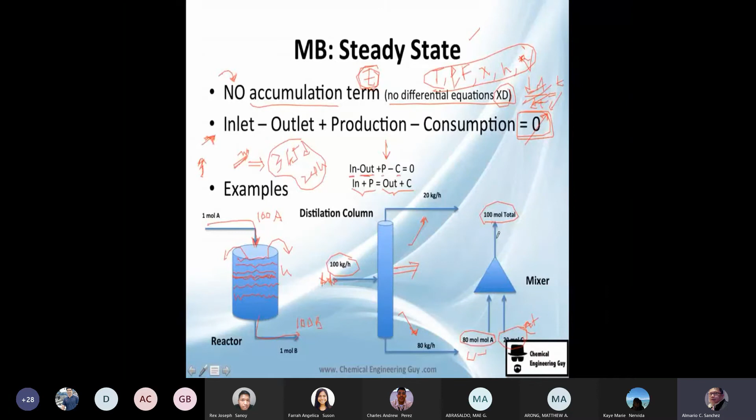Now we go to the mixer. You have 80 moles of A and 20 moles of C, so you will be mixing, maybe this is water and this is ethanol. You're doing this product to sell it, like diluted alcohol for household and domestic use.

So let's do an example so you get more used to the mass balance, especially in steady state. Here, 1000 kilograms per hour of a mixture of benzene, denoted B, and toluene, T, at 50-50.

The operation is steady state. Actually, they might not say that explicitly—they're just telling you because you're a newbie and don't know if a distillation column is in steady state. But probably many processes we'll see are steady state. So either you suppose it or you need to know how the actual equipment works. If they tell you a mixer mixes some kilos per hour, probably it's in steady state.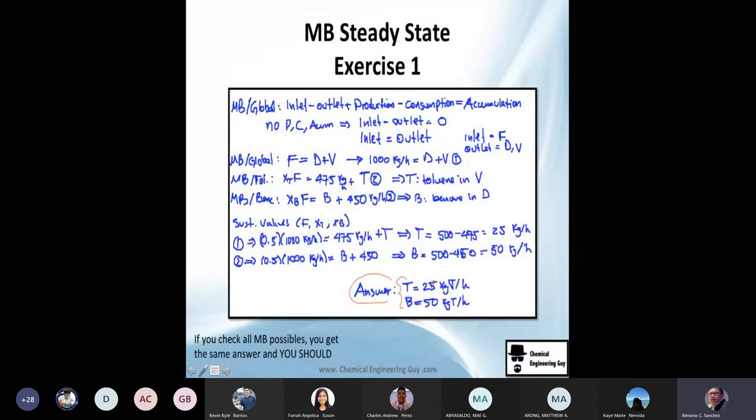Normally, once you have the whole system and all the variables, you just need to go backwards and see what you were asked for. You were asked for this and this, which we already have, so that's why I'm putting the answers here: B and toluene. That's all, everything — that was our mass balance steady state problem, exercise number 1. It's easy, not that difficult. You get to use the distillation column and see how it works a little bit. It is used for separation: they want to increase benzene here, and increase toluene here.

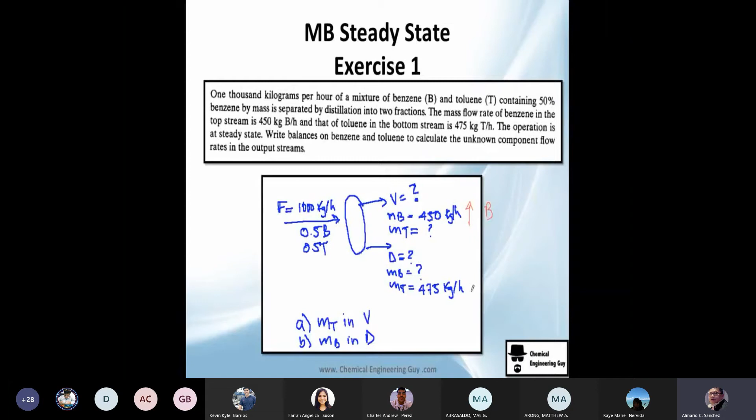Cool, now let's go for a batch equation. A batch equation is very interesting. In general, depending on the case — let's say you have a reactor, because there are many types of batch processes, but we're going to look at the reactor one. There's no inlet. What does that mean? You feed it, and once it's full, you start the actual analysis. It's full at time 0, let's say, of A.

We're going to produce this reaction: A turns into B with temperature. There's no outlet — I'm not taking anything out over time. I'm going to wait for all the A to react, and then discharge the product. So we have no inlet, no outlet, and since it's a closed system, we have accumulation, because A is dropping and B is increasing. So we have production — that's B — and consumption — that's A. That's why we have accumulation: at time 0 we have an amount of A and B, and at the final time we have different amounts of A and B. These are not the same, guys, so take care. That's why there's accumulation — the variables change with respect to time, so accumulation cannot be ignored.

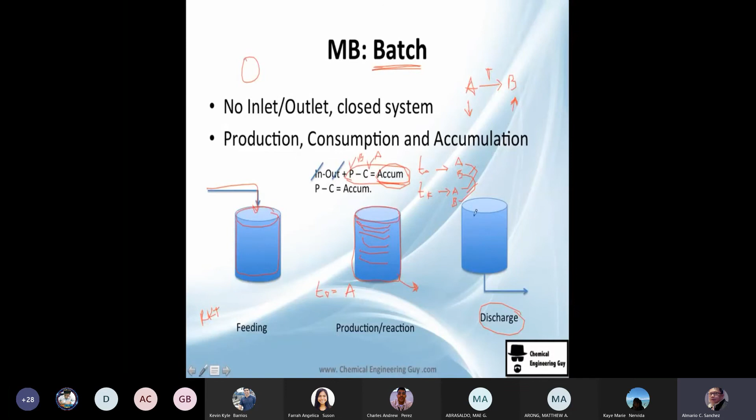This is just one example, but let me show you another type of batch example — we're going to work on this exercise. It's kind of easy, simple. Two methanol-water mixtures are contained in separate flasks. The first mixture contains 40% methanol, and the second contains 70% methanol. If 200 grams of the first mixture is combined with 150 grams of the second, so I have 200 in the first and 150 in the second, they ask: what is the mass and composition of the product?

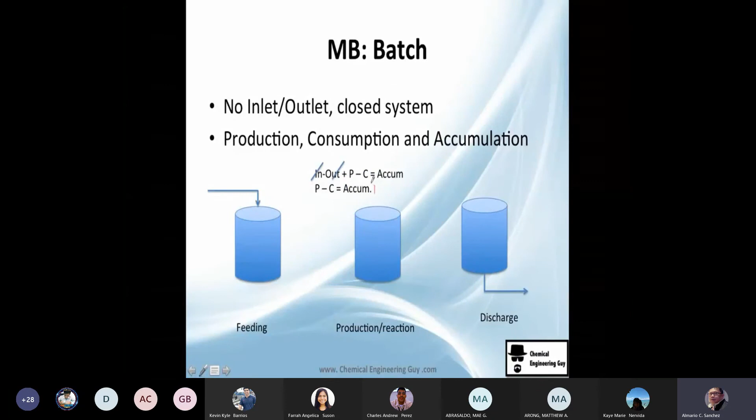The product is the final mixture. So what I'm going to do here is a mass balance. Don't get used to doing the mass balance I showed you before and treat it as a law for batches — never do that. We need to do our own analysis each time. Mass balance is always: inlet minus outlet plus production minus consumption.

So it's equal to accumulation. Accumulation could be either positive or negative. Now, there's inlets - yes, we have 2 inlets, so it's okay. Outlets, no, we have no outlets. Production, I don't think we're producing anything.

No water, no methanol is being produced. So the inlet is actually what we are accumulating, which makes sense because if I just dropped a solution in a beaker and you ask me what's the accumulation, of course the accumulation is the amount of stuff you just pour in. So let's continue, guys.

Mathematically, the inlet is easy. M1 plus M2. Why? Inlet will give you the accumulation. And you probably don't actually have to do the mass balance to know what is the mass. By common sense, you could say, well, if you just pour 200 grams and you just pour 150 grams, you just need to add it. But I wanted to show you how to do it with the mass balance approach. So here it is, 200 plus 150 will give you the accumulation, which is just the addition of those 350 grams.

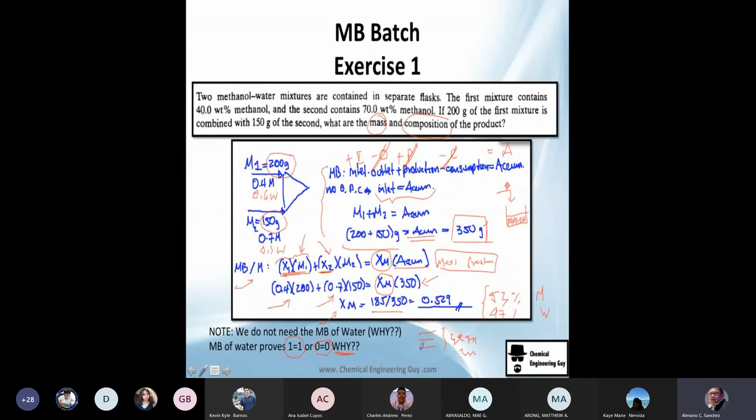We could either use water, or if we do right now a mass balance of water, we will prove so nicely and so cool that 1 is equal to 1, or 0 is equal to 0. And I ask you the question, why? Just think about it. It's something like we have 3 equations and we only have 2 variables to get, so maybe you get used to that if you do a lot of equation systems - you know you only have 3 equations and 2 variables, so you know 1 equation is not needed.

And finally, guys, we're going to see the semi-batch. Semi-batch is a lot way more complex. That's why probably we only see 5% of it in the course. And it includes continuous, which we already have - if you don't understand continuous and you don't understand batch, that's why it's way more complex.

But it's okay. I'm going to suppose you are masters in continuous processes and in batch processes, so you will be happy to get these more complex semi-batch problems.

In general, I will say that accumulation is always included, but it depends, because maybe you have 2 sections. The first section is when, let's suppose you see a reactor, and when you start the reactor, you have this first phase where you fill it, but you don't have all the desired quantities. You don't have the conversion you want, you don't have the flow you want, the recycle you want, the product you want, because you're starting to operate that reactor.

But once you start operating and you achieve the temperature, this is phase 1. You achieve the temperature, you achieve the pressure, you start getting the recycle, you start achieving the product you want. You are now achieving phase 2, and phase 2 will simply be like a continuous process. Okay, I have a reactor, I turn it on. So these 2 phases is what the semi-batch is about.

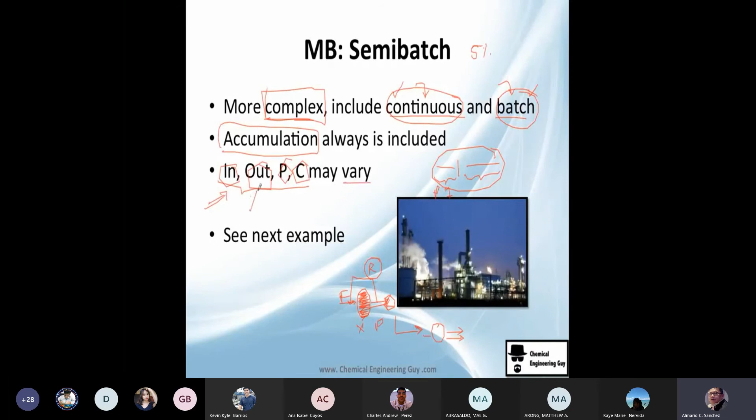As previously mentioned, you cannot know if inlet, outlet, production and consumption variables vary unless you do an analysis. Check which stuff goes in, which stuff goes out, what is the production, and what is the consumption. All this will give you an equation of accumulation, and you can solve it.

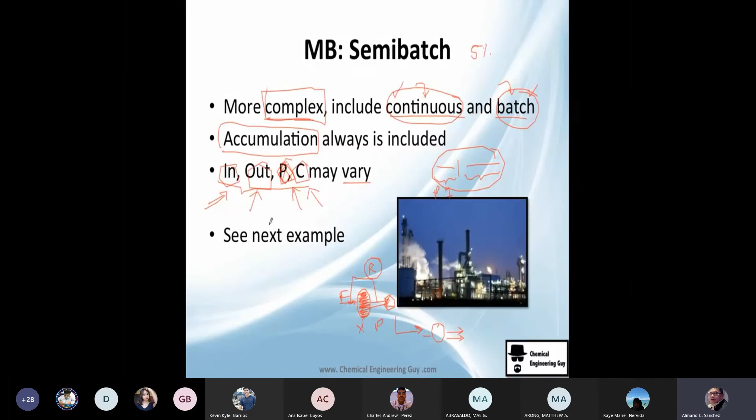I'm going to bring you an example right here. Please read it. I recommend you stop the video and read it before I read it to you guys. So I'll give you time.

Let's read it. We're going to do an integral balance on a semi-batch process. They already giving you what to do, integral balance. They actually shouldn't give you this, they should just tell you it's a semi-batch process, or not even that, they could just say we have this process. But okay, they are so nice, they tell you to do an integral balance, giving you the answer for everything. But don't worry. Air is being bubbled through a drum of liquid hexane.

Hexane is liquid. We're using air and it's being bubbled, and they give you this rate. What does this rate mean? It's how much we are feeding air, the air feed.

The gas stream leaving the drum contains 10% hexane. What does that mean? It means air comes in here, and because we have hexane here, the air and hexane are mixing. But air cannot stay in the hexane, so the air goes out, and surprisingly it has 10 mole percent hexane, and the balance is air. So what happens is dry air goes inside and goes out, but not only dry, it has a little bit of hexane.

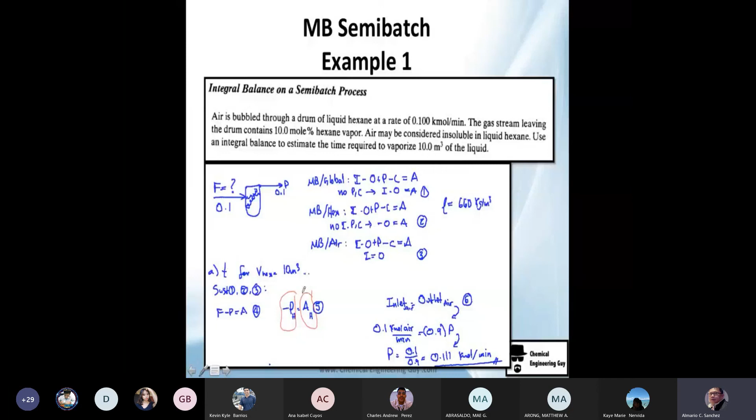From 7 and number 5, we know accumulation of hexane is equal to minus P hexane. So accumulation will be equal to this. You have two equations, now solve.

You substitute this one and this one, so you get this here. And this is equal to this. Sorry for all these lines, but it's to show you how I got this.

This is very important because you now have a differential equation, which is easy to solve. You just first, we drop this one here. Molecular weight, we can leave it here, and the moles, we can leave there.

So actually, we just need to substitute the amount of P. This will be the differential. Hopefully you know that's math.

And you know that this here, guys, is the moles needed to take out. Why? Hopefully you know why, because I'm not going to explain it to you guys. It's so easy, you need to know it.

So continuing, we have this, and the differential will give you time final minus time initial, which is, I don't know, normally the initial time is 0, so you get the final time. Just divide this and you get the answer in minutes, which doesn't make that much of an impression.

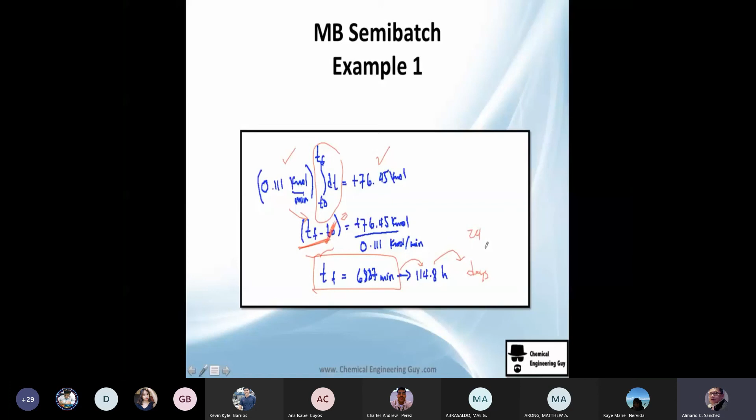If you say 6,000 minutes, no one will actually know how much that is. So you can change it to hours, 115 hours, or you can change it to days, which will be about 4 or 5 days to take that. So it's a long time, a lot of time.

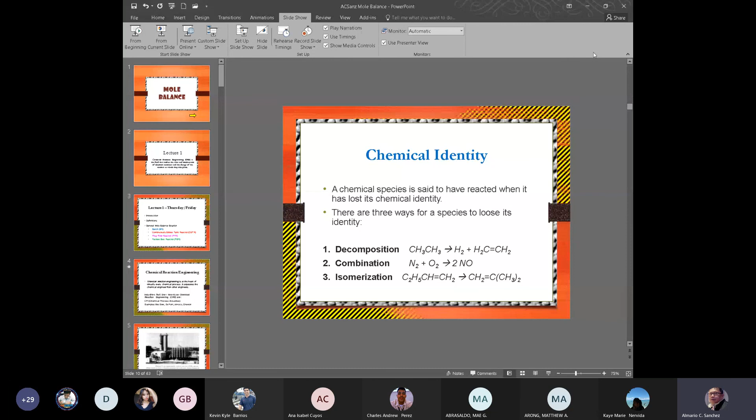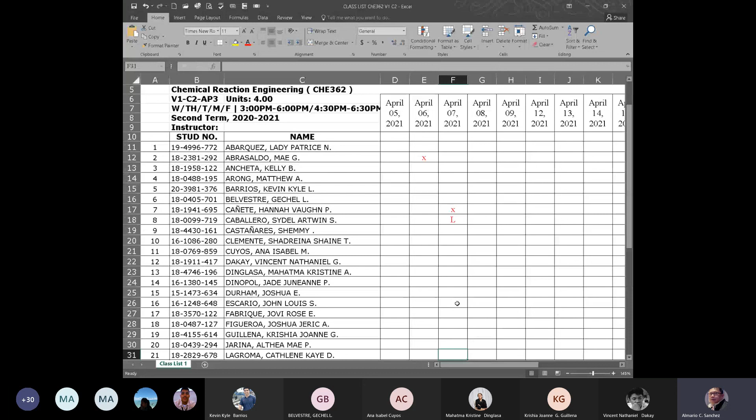Abarquez, Present, sir. Abrasaldo, Present, sir. Ancheta, Ancheta na wagtang. I present, sir. Na Anchita? Yes, sir. Ah, Present. okay. Present. Arong, Present, sir. Barrios, Kevin, Barrios present, sir. Belvestre, Belvestre Present, Gechel. sir. Present, sir. Okay, Cañete, Hannah, wa jud ni? Caballero, Present, sir. na-late ka? Yes, sir. Castañares, nawagtang Castañares. Clemente, Present, sir. Cuyos, Present, sir. Dakay, Present, sir. Gata, Present, sir. Binopol. Sanyara, sir. Present. Present, sir. Dinglasa, sir. Kasanyaris na Binopol, day. present, sir. Okay. Binopol na. Durham, Present. Escario, Present, sir. Brique, Present, sir. Brua, Present, sir. Guillena, Present, sir. Jarina, sorry. Present, sir. Okay, sir. Groma, Present, sir. Mando, Present, sir. Luwab. Wa si Luwab. Present, sir. Okay, sorry. Sorry, sir. Lian. Okay. Lumibaw. Present, Lumibaw. sir. Okay. Muley, Present, sir. Burok. Burok. Nagluto ni. Nagluto ni sudan. Nirbida, Present, sir. Alice, Present, sir. Pipito, Sabin. Pipito, Present, sir. Present. Iris, Present, sir. Brandas, Present, sir. Ponte, Present, sir. Rubin, Present, sir. Tanoy, Present, Tanoy, sir. Sinilio, Present, Sir Senilio. Susun, Susun, Present, sir. Susan. okay. Toledo, Present, sir. Vergara, Present, sir. Yaon. Present, sir. Okay, so I Sir, hope you is understand sir. the yes. Na si Kisay na. Present si Morok, sir. Pero hinay lang iyang volume sa microphone, sir. Okay, sige. Kisa pa. Yes, sir. Kanyete wa jud no. No, wa jenis kanyete absent man ni gani.